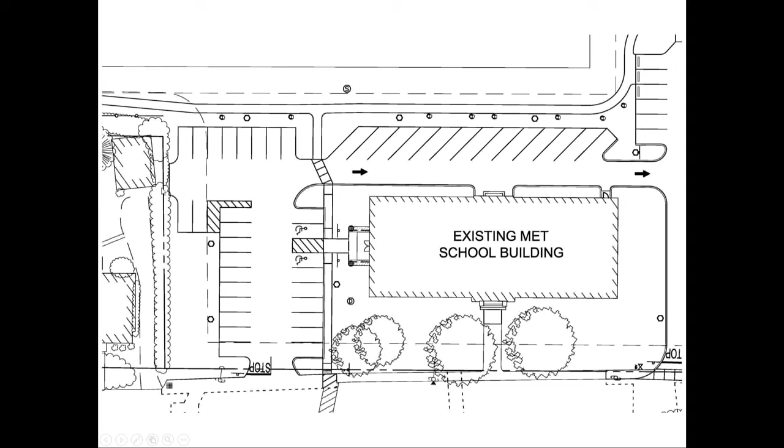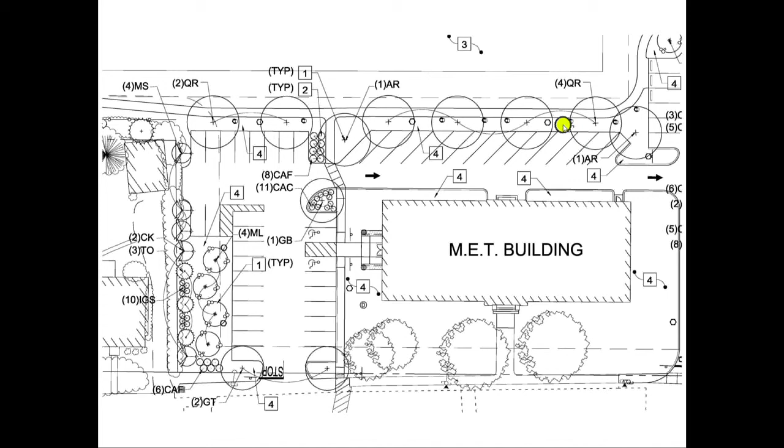The landscape plan, as Jeremy previously mentioned, conforms with the town requirements for buffers. This is something we didn't really look at that hard out in the field, but it's an extensively landscaped buffer, including canopy trees or ornamental trees and shrubs within our created landscaped area here by removing pavement. Also, the existing hedge right here is being maintained. We're also adding a series of red maples - that's part of the landscaping and other buffer area that we're putting along the walkway, between the walkway and the parking area.

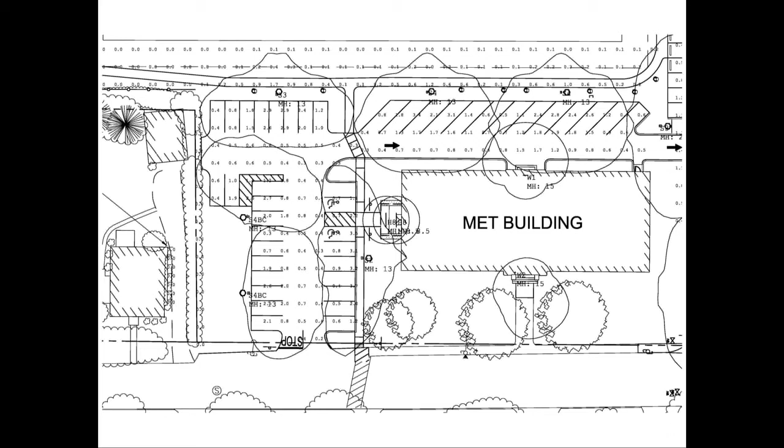Site lighting has been added to this that was previously not there. These fixtures are of the same type, LED fixtures with full cutoff, backlight control, and the same correlated color temperature that we previously had. We'll note that one thing as part of this application is that the fixture was value engineered from more of an architectural fixture to more of a conventional shoebox fixture, but the lighting properties are very, very similar to the previously approved fixture.

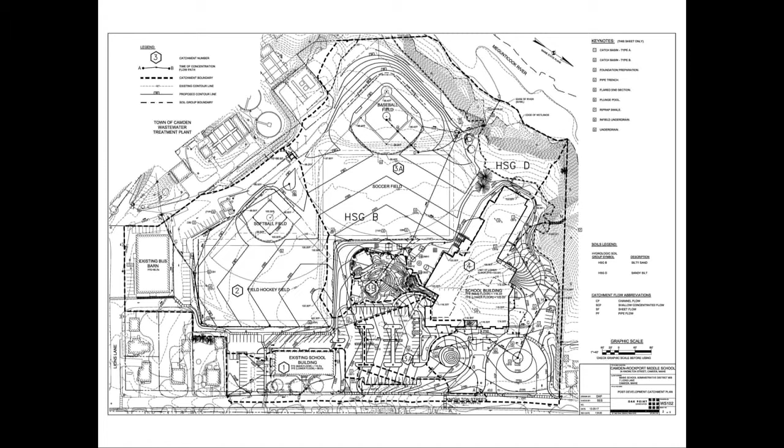We talked about drainage already. This is the pre-existing drainage plan and post-development. There's really not much that's changed in that outside of the area around the MET. Those were the numbers that we just talked about as far as the pre-development and post-development flows. And this is the plan that was submitted to you after the fact that shows the clouded area for the walkway. I don't know if that about summarizes it.

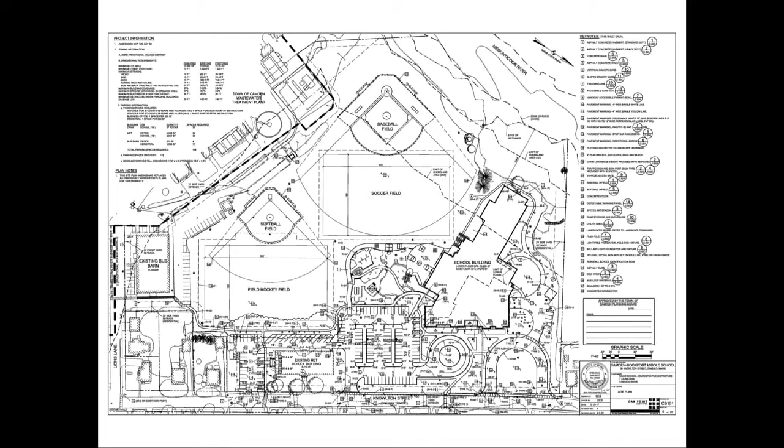This covers the changes to the site. I don't know if you want to talk briefly about the building or anything. Let's see if we get to that.

Primarily, the major changes are obviously going to be the demolition of the remaining portions of the existing middle school. We're going to be maintaining the original footprint of the Mary Taylor building, maintaining existing fenestration primarily. Some of the changes we're making are on this southern side - we're going to remove the fire escape that's in relatively poor condition and add a new accessible entry there with a small canopy to help delineate that entrance. We are going to add some additional windows in the quarters as you go on the upper two floors. These are the occupied floors of the building, but primarily other than that, we're going to be maintaining the existing fenestration and architectural character of the building.

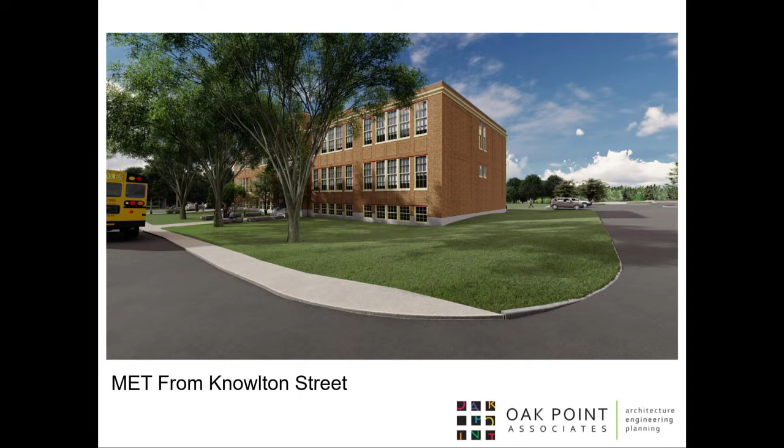That's the end of our presentation.

You want to leave this up or just? Yeah, I think you can leave it. Just it in case. All right.

Okay, so we need to go through and check that all the requirements have been met. Remember, I went through and made sure that they have met all the submittal requirements and that all of the development standards have been met. I did a memo to that effect. Yeah, you can do a motion.

There's language, Jeannie put some motion language there for you that I think you can use. We're going to have to, after we do this, continue the public hearing that we started a month ago.

Should we do any discussion beforehand? Well, that's after we've opened. Sure, generally you do the discussion, you get into the deliberation after you close the hearing. We haven't opened that hearing yet. Oh, okay.

And then after the hearing, we'll go through all the... That's how I would handle it, yeah. Okay, so first of all, we need to decide if we're willing to enter Jeremy's memo into the record.

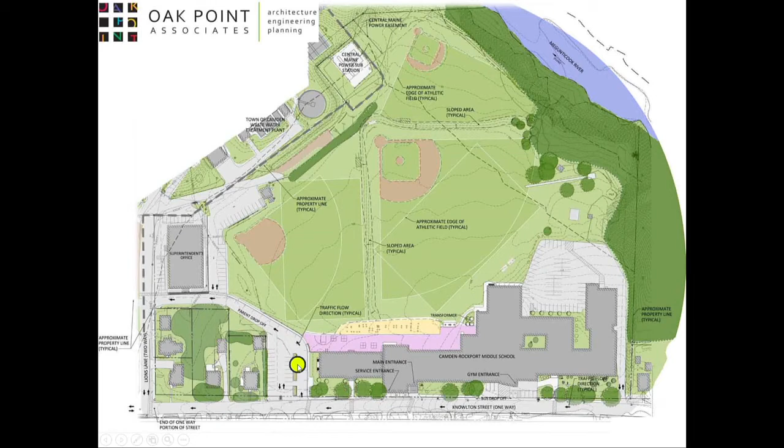You said the parking around the bus barn is being eliminated. It's being maintained. The connection road, yeah, let me go back. That road where you saw the parallel parking, that's what's been eliminated. This road right here, I don't know exactly how many parking spaces are right here, but that's being reconfigured.

That's part of what the project is, that we're eliminating that to maintain this, and now we're putting parallel parking in here. But all this parking right here is still here. We're not touching anything over here, other than we're adding a space where we're eliminating that, or two, where we're taking out the access.

My point is, when you pull into that parking lot for the MET building, you will no longer be able to turn left and exit through the bus barn area. So what it does is it creates congestion coming over into the middle school. You have the opportunity, yes.

You have two things you can do. This is perpendicular parking, so you can go two-way coming in and out of here. Up until this crosswalk right here, those are conventionally sized parking tiers, meaning they're 60 feet wide, with 18-foot spaces and 24-foot wide aisles. This is about as conventional from a parking standpoint as it gets.

So this is two-way, you can come right back out this entrance here. Once you enter, it's one way along the back, and then you come back in here. So when you define congestion, I think from a standards standpoint, this is like any other school: when a school lets out, the first thing that happens is a series of parents picking up.

You're going to have buses in the bus loop, which is now separated, taking this off the street, and all the buses are over here. Now we have opportunities to queue all the parents and pickups and drop-offs through a loop in here, providing more desirable parking relative to the actual building entrances.

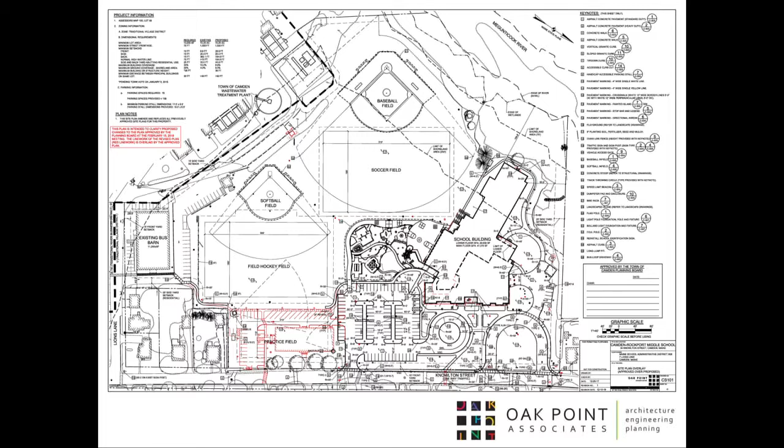I'm just, with all respect to Mark, who owns property on Knowlton Street, I'm looking at this a different way. I think you have too much parking.

Part of the hue and cry of keeping that school on Knowlton Street was that it was an asset to the village, and kids could walk there, walk downtown after school, and it wasn't going to turn into another Route 90 school with acres of parking around it like the schools out on Route 90. This, to me, is just so American. It doesn't acknowledge nature that could come up and kiss those schools with a reduction of parking spaces, or acknowledge kids going on bicycles or walking. It's turned over to automobiles. And I would have thought we'd have learned that as long ago as the 1950s, that cars have their place, but they don't have to be the epicenter of it.

So I wish that you had reduced the number. But again, I understand Mark's contention. I know how pleasant it would have been to drive by that school and look from Knowlton Street into kids playing in those playing fields. And now I'm looking through 137 cars.

I think the reality is it would be great if we relied on cars less and the busing system worked and parents utilized it more, but the reality is there's a lot of pickup and drop off by parents. And if we don't provide both the queuing space in that parent loop and the additional parking, we're going to be back to the same problem Mark was concerned about, cars backed out onto the street, and then we've done a disservice to your community. You see my point, though. Completely. But I think the reality is that this is an appropriate amount given the daily functions and the after-school events that will spill out of the site if we reduce this any further.

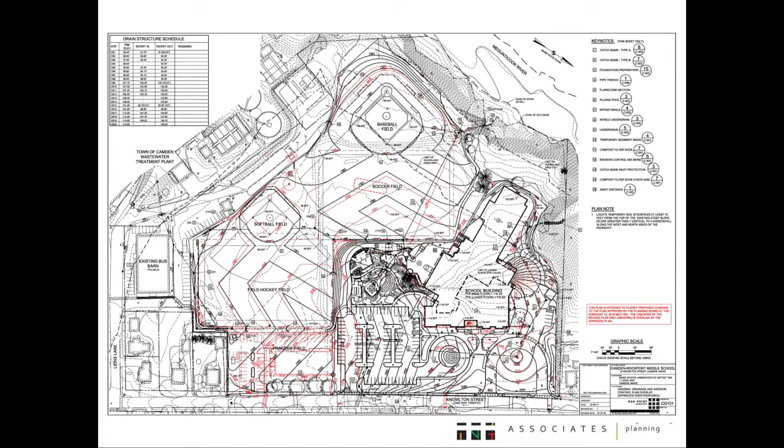Okay, my other question is on the north side, you're regrading this circle area here, and it looks as though instead of being convex and pitching as much of it away from the building, we're now kind of cupping it and pushing it towards that north facade at 103, with the finished floor at 103. It largely has to do—and I don't want to blame anybody, but I'm just going to point at the guy next to me—subtle.

It has to do with there's a door over here now that was added, so we had to drop grade a lot faster. You can see how originally the grades came around the corner and all the way to this access point right here. But this was an egress issue, wasn't it?

Yeah, there's an egress door that comes out of there, and there's an overhead door for utility access to the basement mechanical space. So my question is, are you confident that the water's not going to pool in that corner and it is going to make it to that catch basin?

It is. There's a distance that is sloping away, and the fine grading along the building will flow away from it. I don't know exactly off the top of my head, but it's probably like 10 feet at 4% or something along those lines. So you do have that in your details that the grade carries away from the building? Yes, it will go away from the building, and it will go around.

Yeah, that was my only worry in looking at it. I'm just going to point—this is the catch basin that we're talking about. Yeah, he's got a 102. And if I looked at—should it go to it, right?

That's what's going to happen—there's a low spot outside of here, somewhere over here, and there's a couple spot grades in there. So it's going to have a low spot grading, so it's going to come away from the classroom wing, right here.